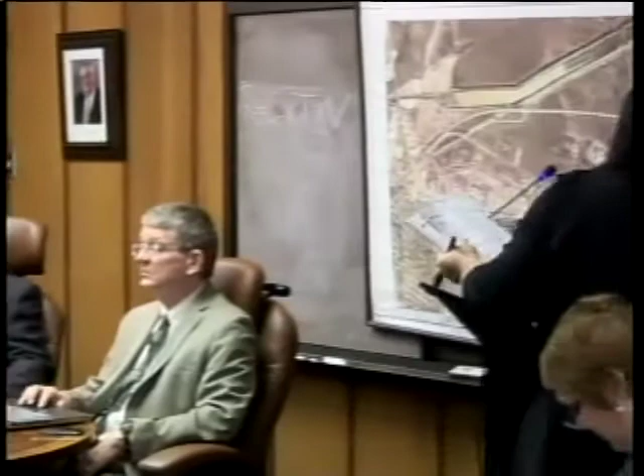Debbie? Commissioners, the operating summary for the month of February is in your backup. As you'll see, the year started off well. Our operations are almost $1 million in net income after the first 2 months. Cargo statistics are running ahead of last year, and all the other indicators are staying really well. Looks like he's having a good year.

It looks like income is up, but expenses are down. It's a pretty good combination. A lot of our effort has been going into the capital improvements program, and seeing the new patios, we're really growing. It's all fitting together. It's great teamwork. Just keep it up there.

Yeah, the rail especially. Just look at the numbers, same time last year versus this year. That's a good sign. In fact, today they're really moving a lot of cars. And the throughput this year, we're not sitting this stuff on the ground. We've got another slab back. In past years, you'd see that stuff sitting.

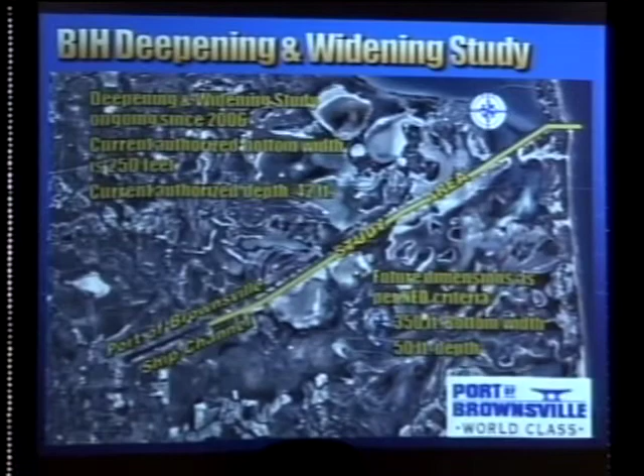The first thing that we always report to you on is, of course, the deepening and widening study. I'm going to go over some of the things that you already may know, because the last time I gave a report like this was 2 months ago, in February. In March, we didn't have the second board meeting.

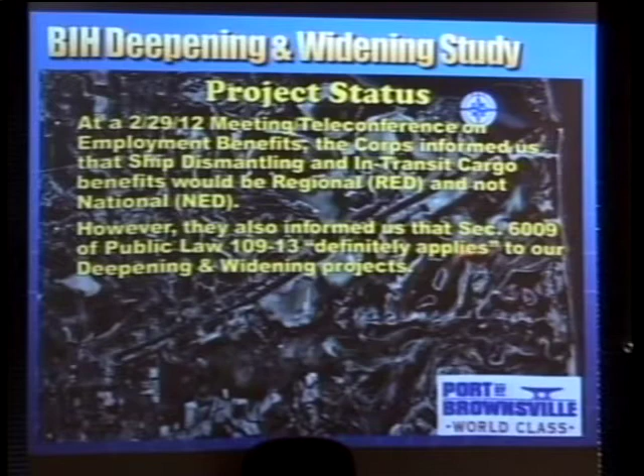On February 29th, we had a teleconference on the employment benefits. The Corps informed us that the ship dismantling and in-transit cargo benefits would be regional and not national. What that means is that even though there are benefits, they cannot be used in the calculation for the benefit to cost ratio that determines where this project is going to wind up. However, the good news is that they informed us that Section 6009 of Public Law 109-13 definitely applies to our deepening and widening project.

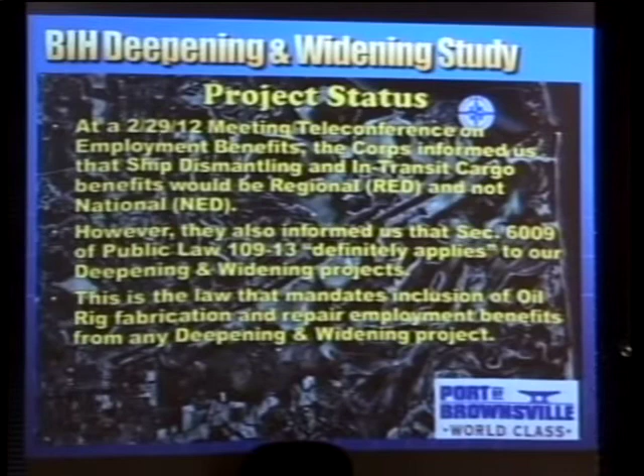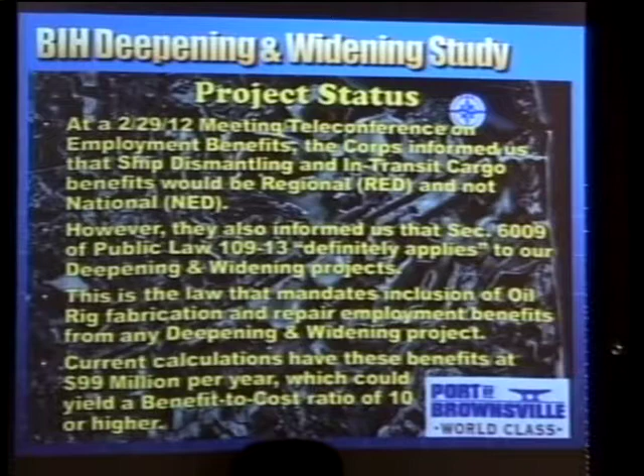This is the law that mandates inclusion of the oil rig fabrication and repair employment benefits from any deepening and widening project. If you remember, our current calculations have these benefits at 99 million per year, which would yield a benefit to cost ratio of probably 10.0 or higher, which is almost unheard of in the studies they have recently done. Usually the studies they've done are considered fundable if they're over 1.0, and this is here at 10.0.

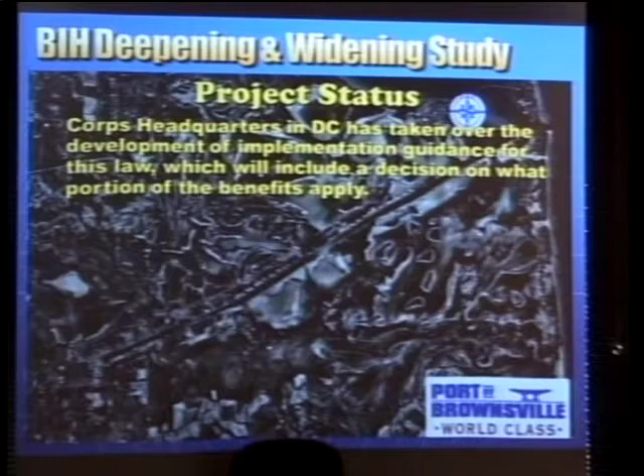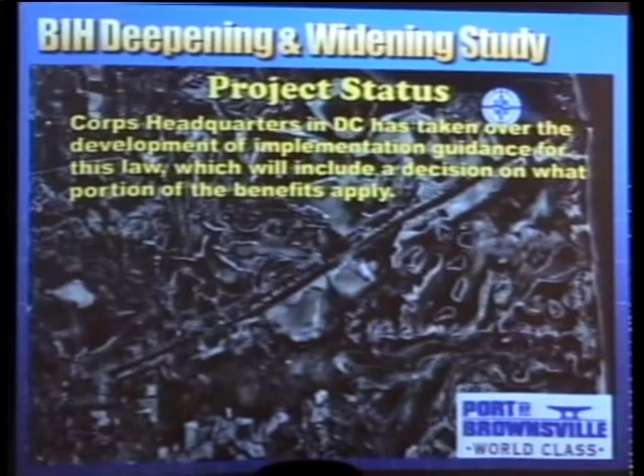So that's why we've been campaigning hard to try to get these benefits included. Right now, headquarters in Washington has taken over the development of the guidance as to how this law is going to be applied, and that's going to include a decision of exactly what portion of those 99 million will apply. Even if they take half of that, which is possible, we're going to still reflect a very high benefit to cost ratio for this project.

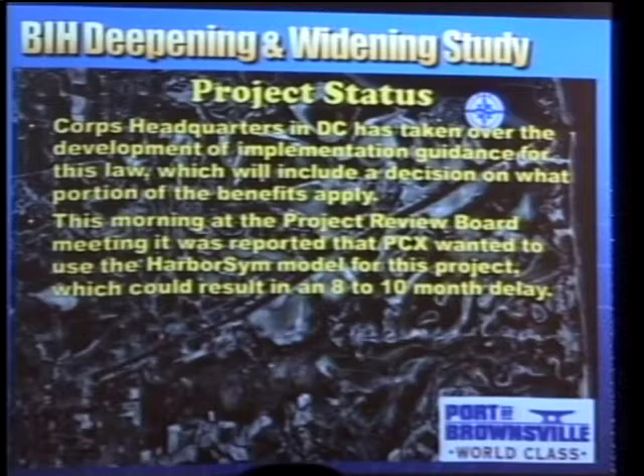This morning I received a call from Galveston, and I reported it to our port director, where it was reported that the Center of Expertise in Mobile, Alabama wanted to use the HarborSym model.

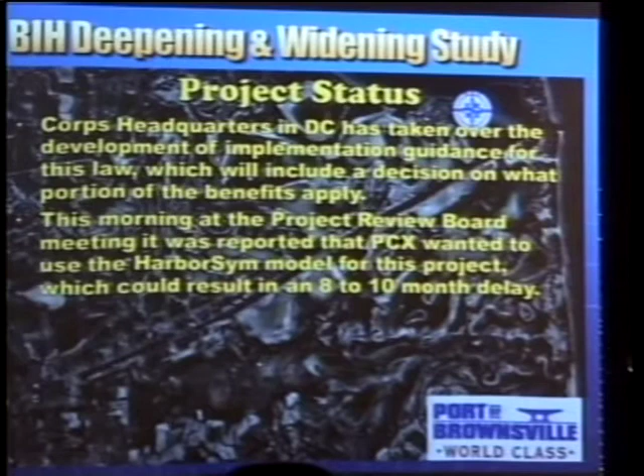Now, what the HarborSym model does is determine what the benefits are due to deepening. But the HarborSym model is a new model that hasn't even been certified yet. The issue is that Galveston already sent the report to Mobile, to the PCX Center, with all the numbers finished according to what they have. I haven't seen that report because that was something recent that they did. And if we have to go back and redo the numbers with the HarborSym model, it could have an 8 to 10 month delay in the project.

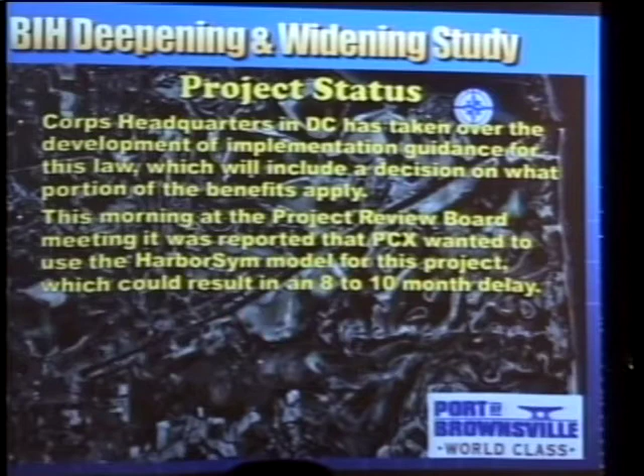However, I will tell you that a few minutes ago, the Galveston district and Dallas, which is division, were working together to make sure that the numbers they submitted would be used. The good news is that it appears highly likely right now that we're not going to have to go through that delay. So I did want to report that we had that concern, but as of this afternoon, that appears to be okay.

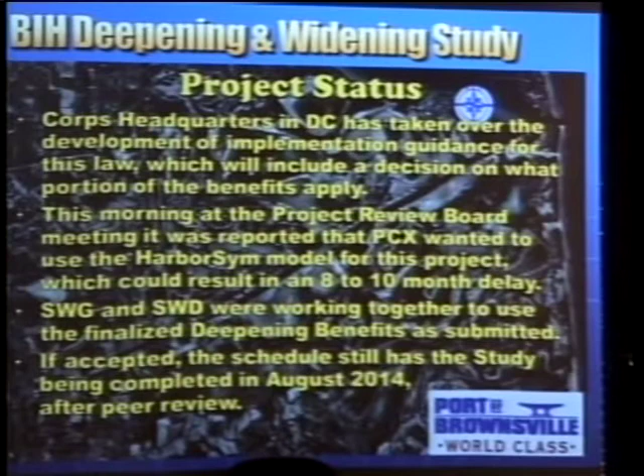So if accepted, the schedule still has the study being completed in August of 2014 after peer review. Again, we're working with headquarters to try to reduce peer review so that we can get a study finalized earlier than that. August 2014 may not work for us, and that's kind of new. We had hoped that the study would be finished in 2013. That one year is significant enough for us that we've raised that as a real concern.

That's why we want to eliminate peer review, because, well, peer review is not going to be eliminated. What'll happen is that in order to keep on track with accelerating the schedule, peer review can be done at the same time the report is out for public comment, so you don't have to delay the study anymore. Peer review is strictly a technical review, not one that raises questions about whether you should have done this or that—it's purely technical. The assurances we got at headquarters were that peer review would be done simultaneous to the public review, so it would not slow the process down.

That's good news, basically. But August 2014 is a concern, because if you're going to see a major funding bill in 2013, you don't want to miss that window.

Whether you'll see WRDA, the Water Resources Development Act, hasn't happened in 7 years. They're pushing for one, and we want to be in a position to have a chief's report issued—everything complete, in hand—for any major legislation dealing with significant infrastructure funding. That's something we're still working on.

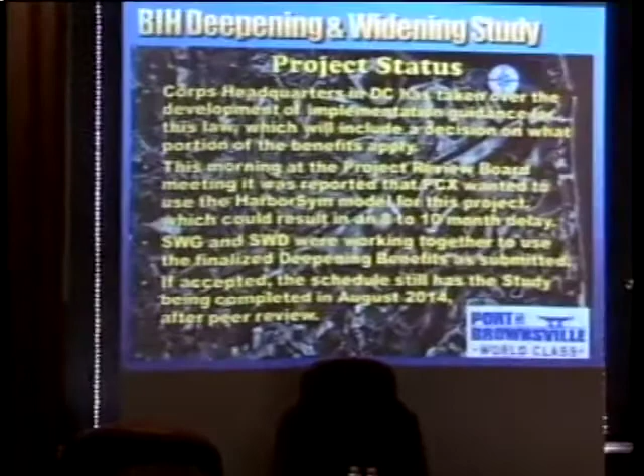Our people in DC are working on that together with our port director, the people in Galveston, and the people in Dallas. We're working through all the levels.

Going back to our projects here, this is a project being worked on right now with our own forces. Our maintenance department is working on the area behind sheds 10 to 13. This is generally the area they're working on right now.

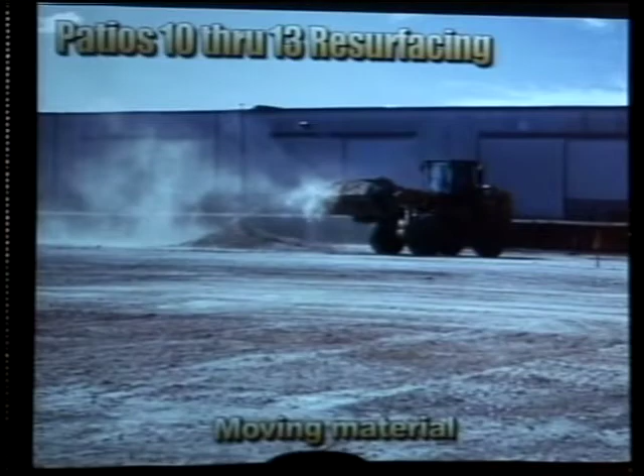As you can see, this is the area that needs to be regraded. We've already set the stakes, and our surveying crew is working with the maintenance department to properly cut the grade. What we're doing is trying to create a ridge approximately in this location so that drainage brings the water out and minimizes runoff into the rail area.

That was one of the issues we had, if you remember, when there was a rain that left that rail underwater. Most of that water actually came from an overflow from the main ditch over here that overflowed over Ostos Road. So we're trying to redesign that to minimize, if not prevent, that from happening. That design has been completed, turned over to maintenance, and maintenance is working with it.

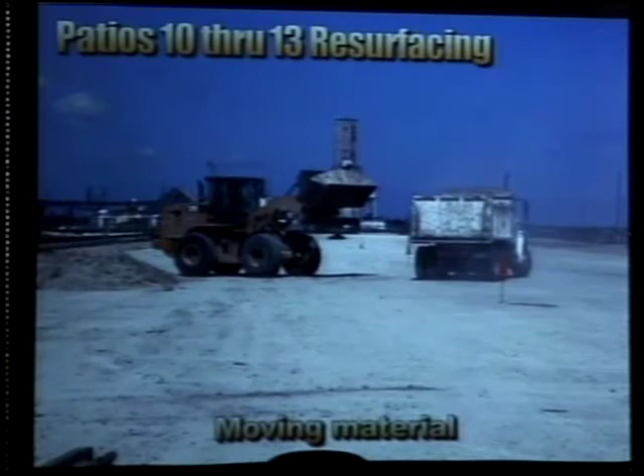That's the area to be regraded. This is our equipment moving material out of there and getting everything ready. As you can see, there are the lath and stakes set by our surveying department, and here's some of the work preparing the subgrade so we can start building up from there.

The other part is that this area has never been used—never been available for storage. So we just want to complete it. We'll be able to recapture or capture more storage area by doing that work, essentially maximizing the use of the area behind the warehouses for storage.

That thing's been on the radar for a couple of years, so I'm glad we're finally getting to it. Are those utility lines that are there?

Yeah, those pole lines just run parallel. That's lighting. Those are probably going to go at some point. We've got, I think, one of the agenda items is the high mast lighting. But that was done some time ago.

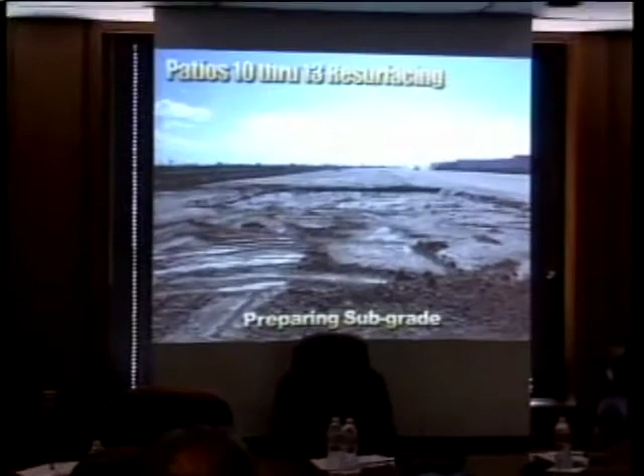The line that was going across the patio, north and south, is already gone. So the only thing left is that pole line, and we may remove it once we get the lighting all done for those back areas.

One of the projects I'm going to show you in a couple of minutes is the TWIC area lighting that we are almost complete with right now. As Mr. Campirano mentioned, we have the high mast lighting on the agenda for you to authorize us to go into that.

The high mast lighting is going to have underground lines and poles closer to the fence, so the old poles will be gone, and it'll be a different type of light that basically illuminates this whole area.

I'll be bringing something to that effect next month, so you can see on the screen more or less where we're planning to have those lights. We're finalizing that project with the consultant right now, and that's why we're asking for permission to go out for bids.

We have one meeting pending next week, still to be scheduled, with the stevedores to show them what we want to do and make sure they're okay with the plan.

So that section where the windmills are, you have shown that? Yeah, I'm going to show it in a second. I think that might be the next one. What was that?

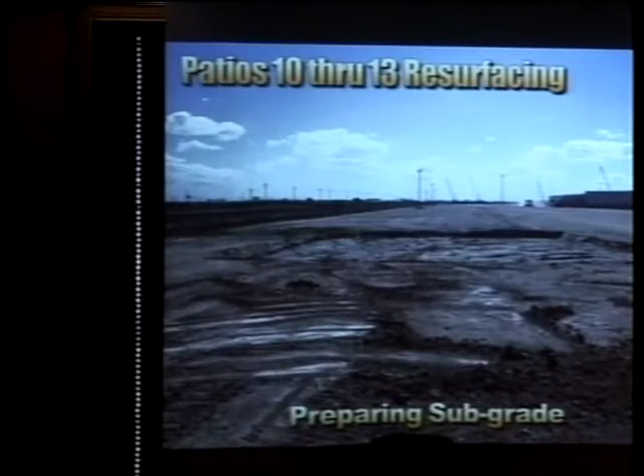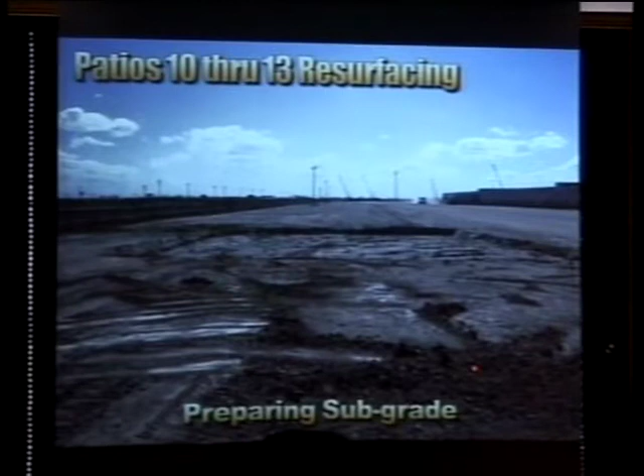Sheriff, what was that patio used for before we couldn't get to it? We've always used it for storage, except for the east part, which we never improved, so we never laid anything down there of significance because it was never prepared. Okay, so now we'll be able to use the whole area instead of just part of it. The design covers the entire area from Dock 11 Road to Dock 13 Road, so with proper transitions, all of it will be covered.

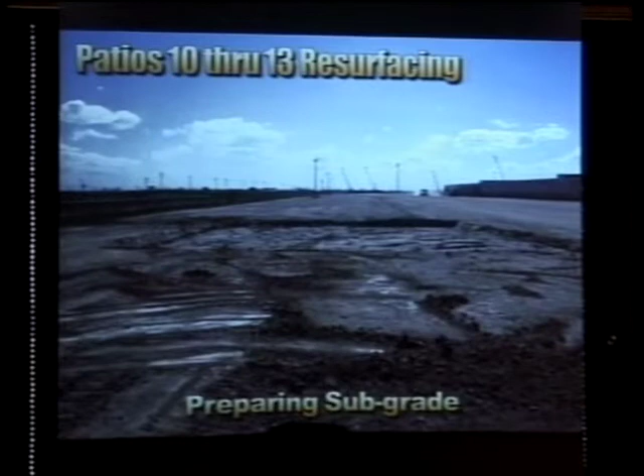Joe said we'd add a little more than an additional acre of storage in that area behind the sheds, on the eastern side. That's premium, because the areas closest to the dock are prime. So we'll pick up additional storage area by using this.

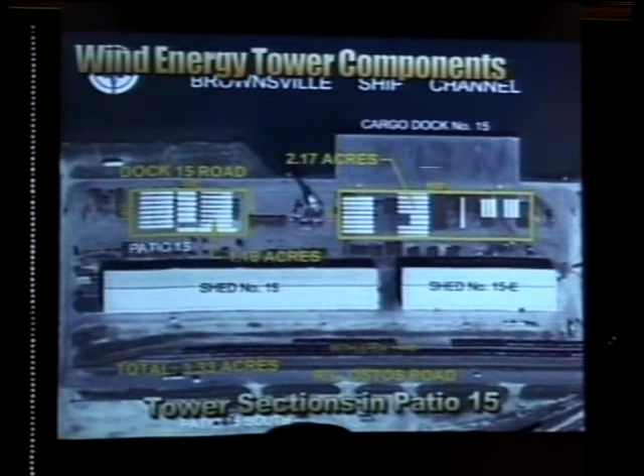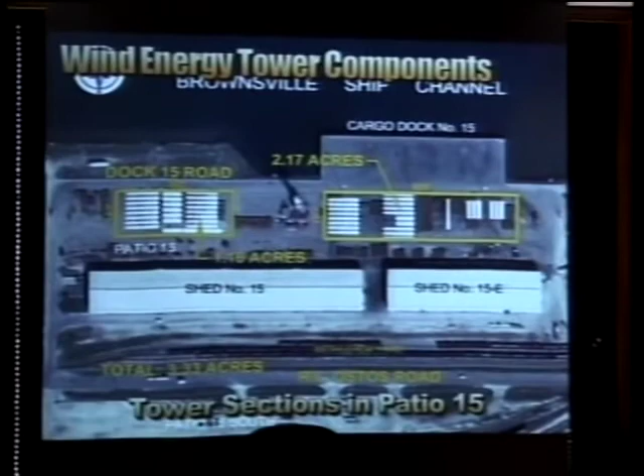The wind energy tower components that have been coming into the port - this is the area on Dock 15, Patio 15, right in front of Dock 15. That is still occupied, as of last time we measured, which was Thursday last week. Everything you see here was the way they delivered it initially. That's still there. In Patio 16, the area east of Dock 15, that's still there too.

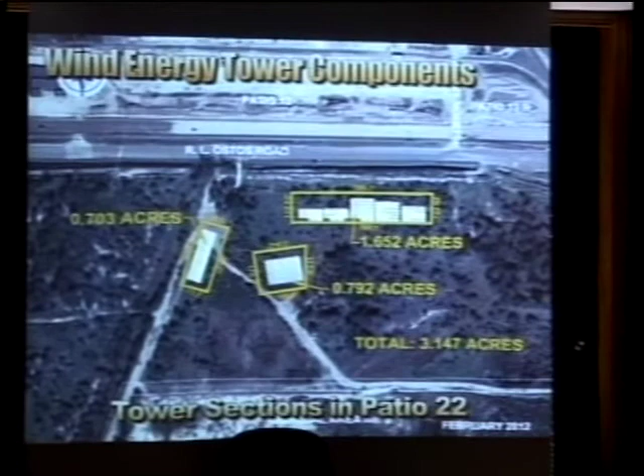On the Patio 22 area, as of February 2012, we had basically just tower components there. But in March, they brought in the blades, which we stored in this area. As of April, they had already removed all the windmill tower components, and they reduced the area where they were storing blades to right here.

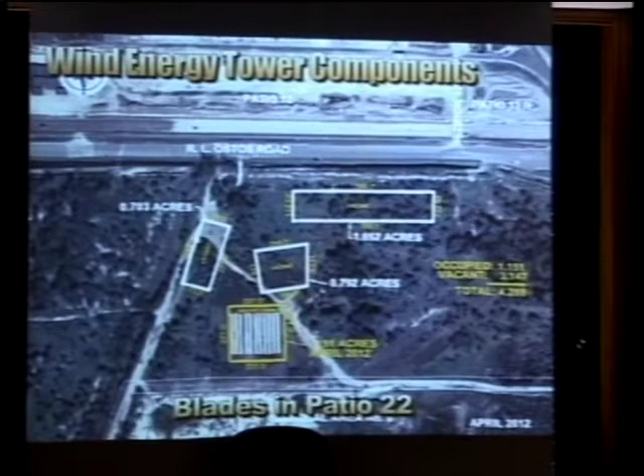We're going to get them off the docks. They're actually eating at it now, just starting to get into it. That's our situation - they removed these first when we wish they would remove those over there first. But we're working on getting those sequenced in that order.

Now I'm going to show you here - back to that area. That patio has a real weak area in it, unless you fix it - it had a sinkhole basically. They avoided it, I think Joe said. So we don't have any plans - there was an area here where we had some soft sand.

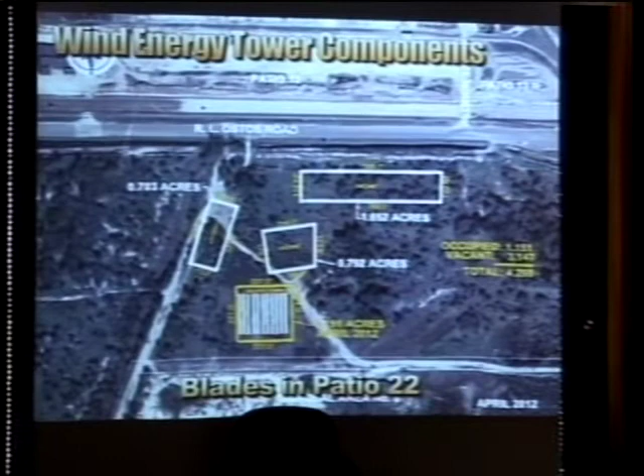We had the soils engineer come in and do some analysis, some penetrometer exercises there, and we determined the areas that were weak. Mr. Garza was removing the weak soil and filling it with better material, then putting limestone on top of that. So that's already bridged over - well, not all of it, but we're working on it.

We finished this area, and in order not to stop and come back to that, we went ahead and finished that whole strip to the back. We went on this side, but they're working on that - the weakness was about in this location right here. So that's being worked on, and we've already determined what needs to be done. We got a recommendation from the soils engineer on how to proceed, so that's already been addressed.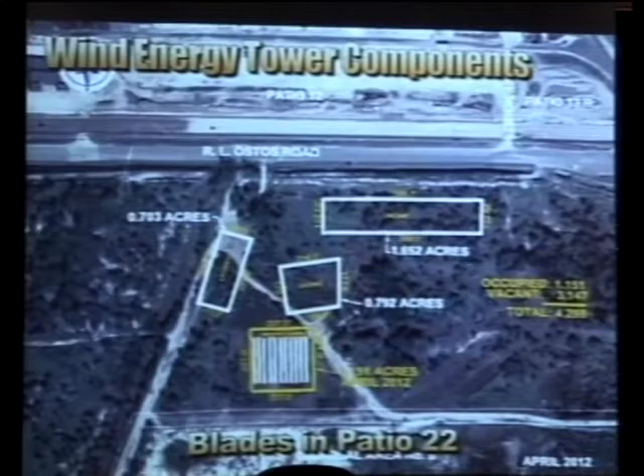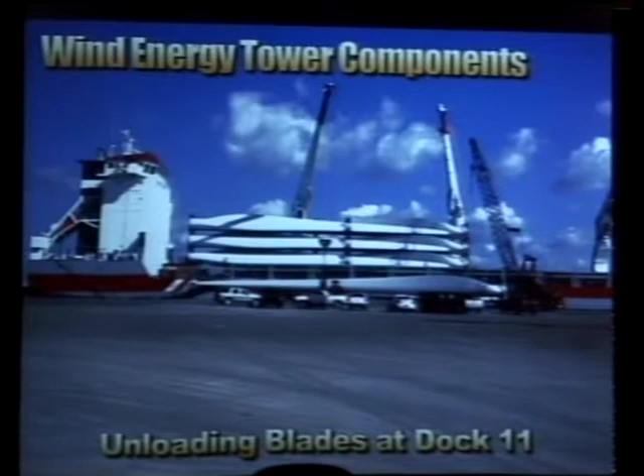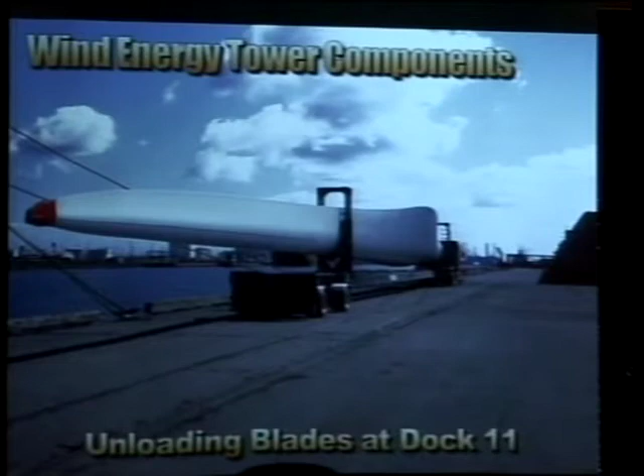Here's a couple of pictures of the unloading of some of these blades. This is the second shipment of blades, the one that's actually there on Patio 22 now. Here you can see the blade on the truck going out, and here it goes out through the back and turns out on the east side on Dock 13 Road. This is the 45 blades that are remaining there - I call it remaining blades because that's what remains. Originally they had 80 blades, and most of those already went out. Now this is what's remaining there, basically, of the components.

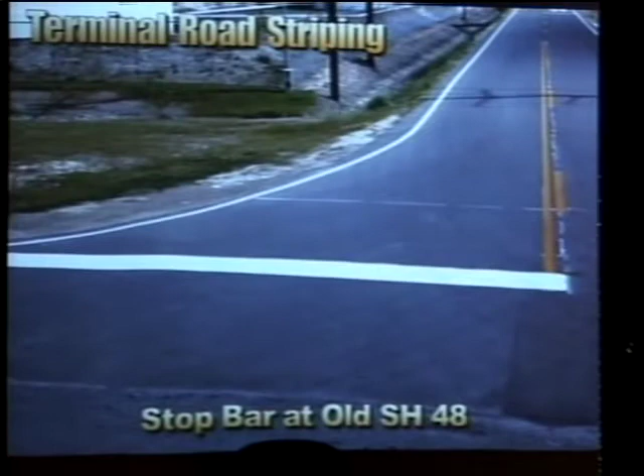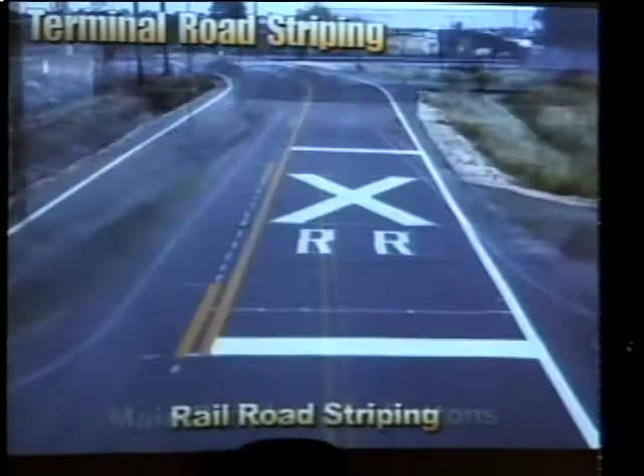Another project we've been trying to do for a long time - we finally got some work done on it. This is Terminal Road, an overall view of the striping. This was done last week for the stop bar at Old SH 48. This is the main striping, you can see the traffic buttons at the gaps here, and this is the railroad striping, in anticipation of the railroad. The only thing pending now is setting up the traffic signs - we have the traffic signs already.

I have them in my office. Well, get them in, because as soon as those line up, we're going to see hundreds of trucks, right Kevin? So get them in. I was waiting for Kevin to say yay. That's why I looked at him over there. It's okay dude, where are the trucks? Come on.

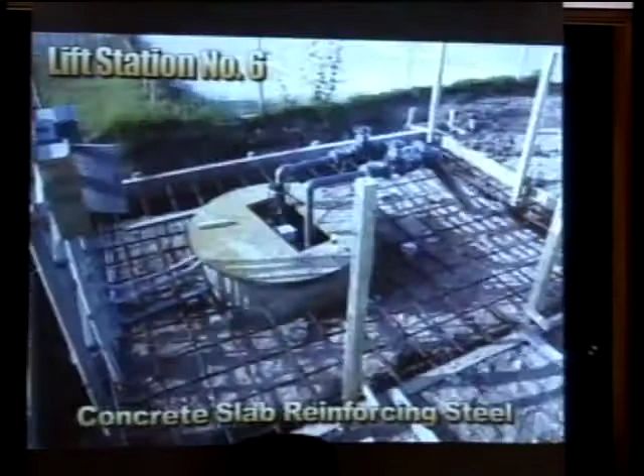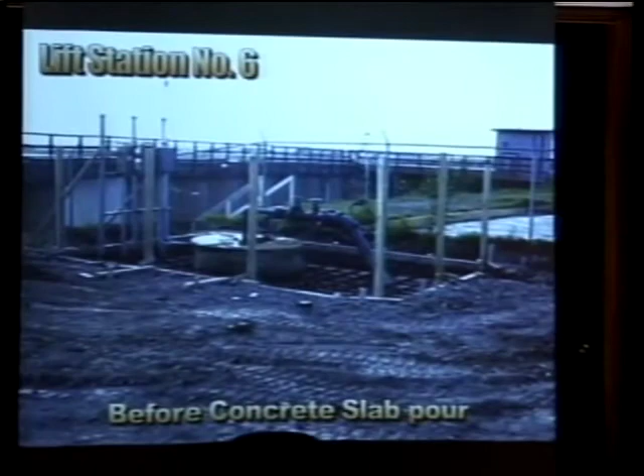This is the reinforcing steel there on the lift station. This is the electrical control panels that were set with new poles with a new H-frame. We actually wound up having a third pole in the middle because the electrician had set the pole on the wrong side, and we had him put it on the correct side. So basically this is the site before the concrete slab, where you can see the reinforcing steel.

Here's where they're starting to pour the concrete. This is when they're working on most of it right here, and then here you see the slab done. This is basically the completed work by the contractors.

Now our staff is going to go and set the horizontal - what do you call them - the horizontal bars for the pickets that will go on the fence. There's not going to be a door on these.

So I originally had planned on having a door right here, but Mr. Casa and I agreed, since there's a man door in the chain link fence a little bit further this way, we're going to relocate the man door to right about there. So the access to the lift station is now going to be from the other side, and there's not going to be any access on this side.

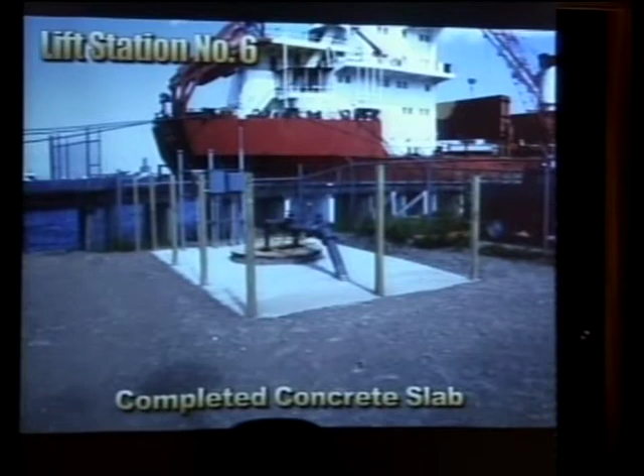The reason I wanted to do that is because we're going to be able to landscape this and not have trucks coming in and out from this side into the area in front of the Seamen's Center. So we've got that taken care of. We're going to pour a little bit of concrete slab right there just to let the guys walk in, and then I'm going to surround the rest of it with some limestone, so we keep the vegetation under control in that area within the fence.

But this fence is going to tie into this fence right here, and as you can see, that pole is already there next to the other chain link fence. So we're going to have two chain link sides and two wooden fence sides, but the wooden fence sides are the ones that shield the lift station from the Seamen's.

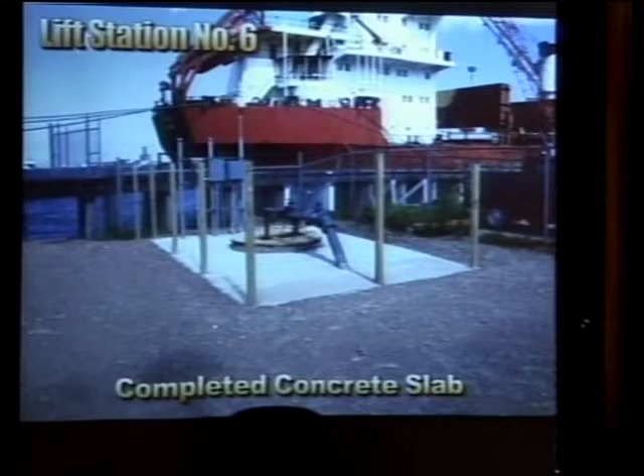The wood fence will then continue on down and connect with the other - yes, so it'll be a continuous wood fence all the way, and it'll separate the space between dock 2 and the Seamen's, dock 3, excuse me.

So that's what we're trying to do with all our lift stations right now, and hopefully next month I'll be able to bring you some more pictures of new lift stations we're doing. There's three that we're doing on the south side over there, all the way to Bay Bridge, that we're trying to upgrade to this standard.

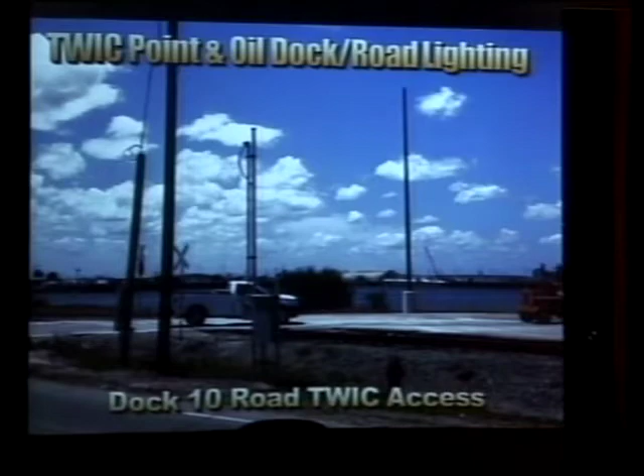Was it stolen on Port property? Yes, somewhere. It was stolen on Port property. The thing is, they left poles with the fixtures overnight because they were going to set them up the following day. When they came back that day, 2 of the fixtures were missing, and those are custom-made fixtures.

They're not shelf items, so they have to order them and get them made and shipped. They expect to get them before the end of the month. Do our cameras pick that up? No.

Chief is here. Well, 2 things with that. One is that we weren't advised that the material was left on the ground, so we keep an eye out. Secondly, we didn't know anything about it until after the fact, but no, the cameras didn't pick it up. The area where they were picked up was over here on the south side of the patio area that we're working on, and the cameras don't pick up that area. So the cameras usually go towards the water.

So anyway, that's the TWIC lighting. Here's the Dock 10 one that I showed you, and then the other project is the internal roads project.

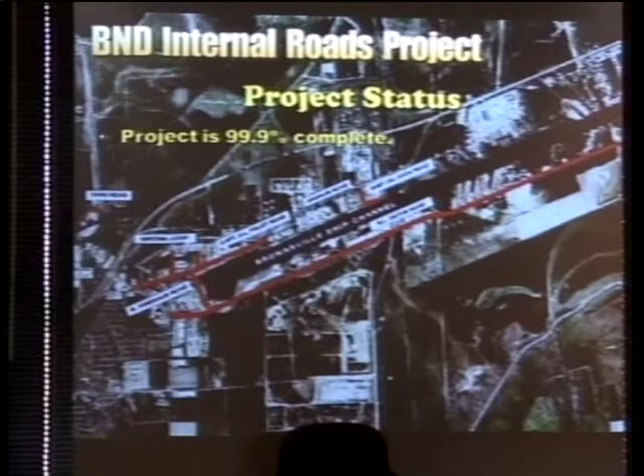This is just a quick report here. You're already familiar with the map. The project is 99.9% complete. We're almost done with this.

A walkthrough inspection was performed in early March, and we found several areas where we saw some problems, and we marked them for the contractor. They identified and marked it. The contractor addressed most of the areas of concern. Some of the areas were iffy, you could see some issues, but there was no significant settlement.

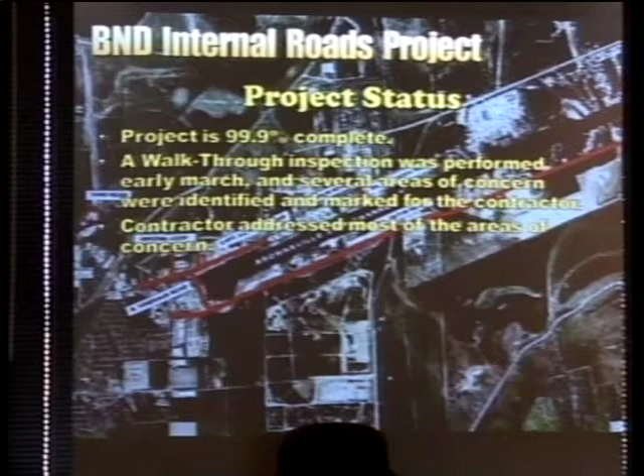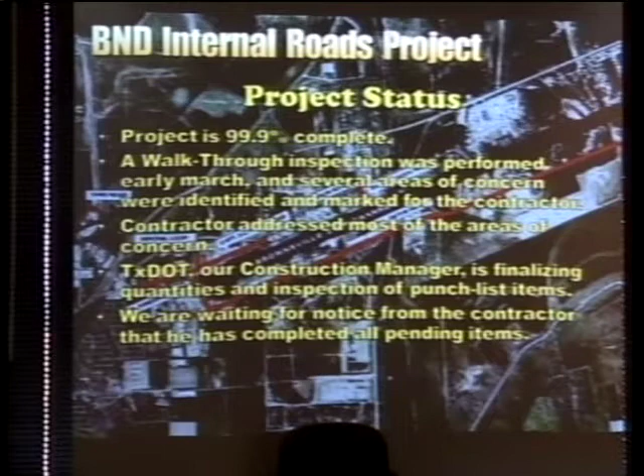TxDOT, our construction manager, sent an email yesterday, and we got a response from the contractor today that they're finalizing the double check on the quantities to close out the project. So hopefully once that is done, we're waiting for notice from the contractor of completion of the pending punch list items we generated.

And what about the money they owe us? Excuse me, what about the money they owe us?

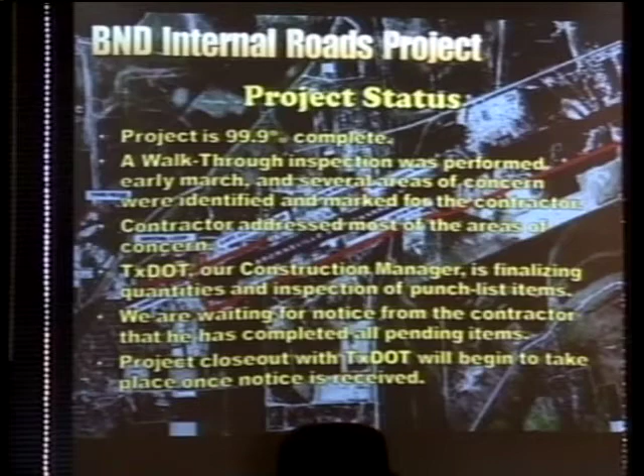Well, the way that we manage that, we worked with them on some of the work that wasn't done, and we got credit back more than what we had projected was our expense. So we've already washed that out based on some of the work that they didn't do that we wound up doing. So that's already—

How did you verify the cost and all? Well, we calculated our cost—our maintenance department calculated the cost we had, which was about $8,300. Then we compared it to the amount we had to deduct from their contract because of uncompleted work and some other issues. Their work was in the 10 to 11,000 range that had to be credited back, so that washed out our expense from the contract. In reality, it worked in our favor—we covered it in that time.

The other project, a little bit of additional work was done on the connector road right at the entrance. Remember, this is 550—550 is going to end on 48, and our connector road is the road that goes from 550 to Fouts Road.

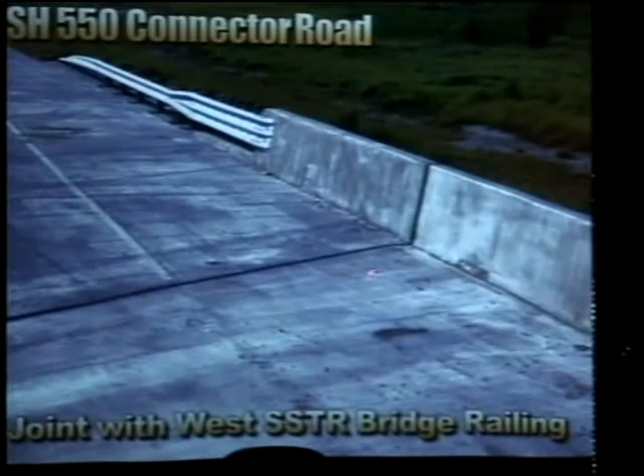The railing here hadn't been built because they were waiting for the other contractor working on 550 to finish some of their work on the north side. So now they came in—this was done about a month ago, but you can see they already put the railing here and the bridge railing, the concrete railing on the side of the bridge. This is the new portion of the work that hadn't been done yet, and now it's there. This is on the other side, and here's the railing on the east side of the bridge.

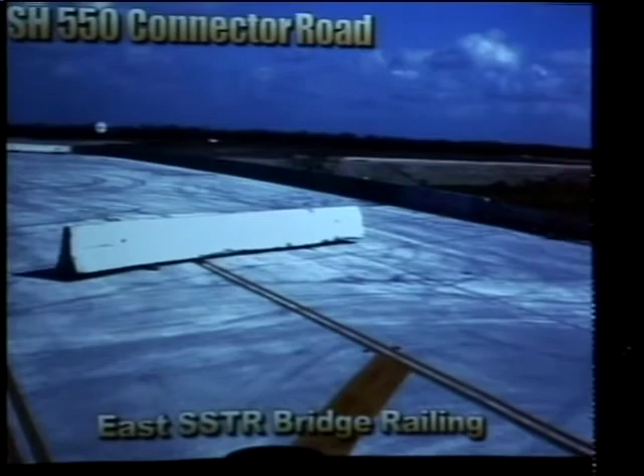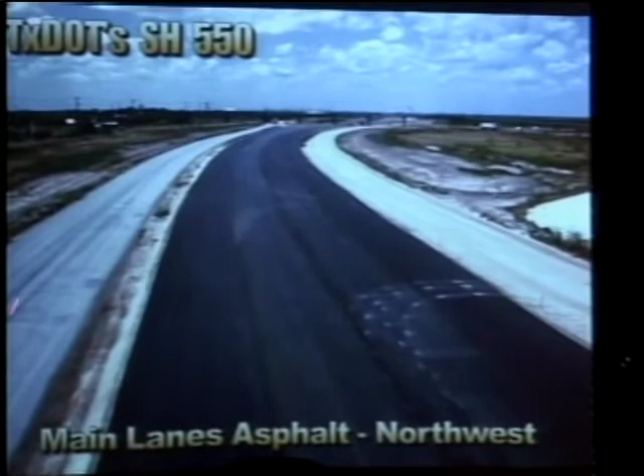And the last project is 550. There's a lot of progress on this one. Again, we showed you this a couple of months ago—this is already hot mix, asphalt surfacing already on the main lane, and they're working on this frontage road with some of the gravel prior to the hot mix.

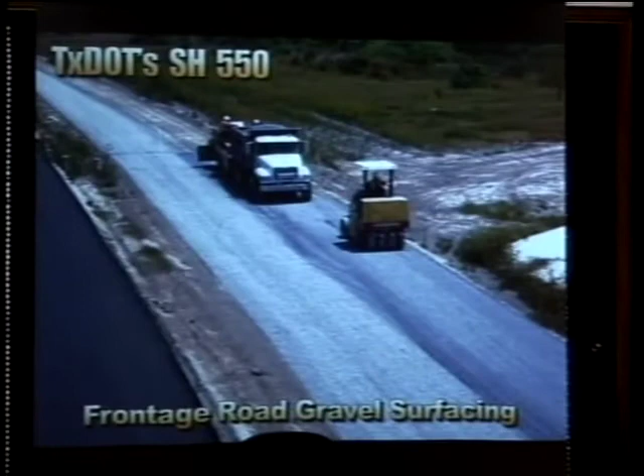This is looking back towards the port, and you can see a lot of work has been done. Here's work on the gravel surfacing on the frontage road. This is the old Port Isabel overpass, shot from the north, looking down towards town, basically in that direction. This is the overpass itself—they've already got all the planking set up on top. So this is a lot of significant progress.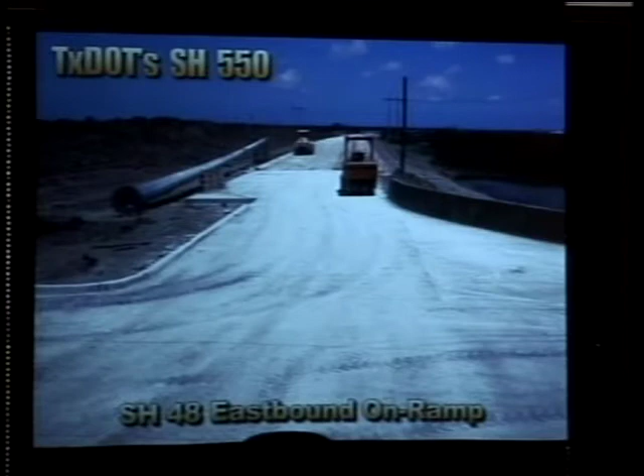This is how you would get off 48 into 550 over here. This is 550, and this is the off-ramp going westbound. This is the eastbound off-ramp where you would get in to get into the port—the port is over here. You would get off 48 to go to the port, and this is the eastbound on-ramp. So a lot of progress they've already done on there.

This pole kind of caught my attention, so I took a close shot of it. And here's the foundation for that pole—that's some of the high-mast lighting that's going to be right there at the overpass.

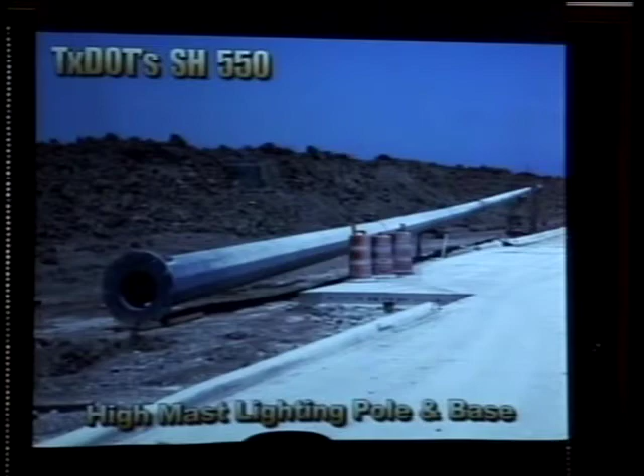On another note, Eddie, maybe you can help us out. When you and I went to the MPO, there were a couple of people mentioning where the entrance of the port city comes in, TxDOT is fixing it, and they've got it down to one lane. People going to or coming from the island who drive by would be most affected. It's a narrow road. I don't know if you could do something about that. There's going to be a bad accident waiting to happen.

Where is that, when you're getting on? What they've done is on 48, the two-lane road is now changed to one lane, and it's very narrow there.

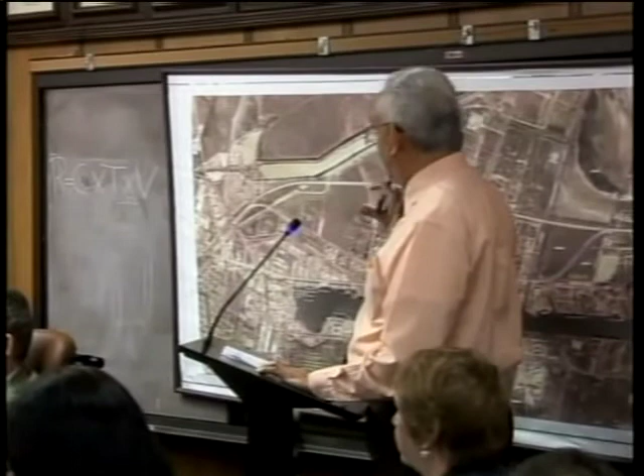Is this, just briefly, where is this high mast lighting going to be, at only on certain docks? Well, basically, the way the project is named right now, we would be selected docks, but the only docks we're looking at are basically the area behind sheds 12 and 13. There's one light going right about here, and another one right in this area, but basically it's lighting the cargo dock area here and the area here on dock 15.

This is the lighting that's outside the security lighting, even though it will also be security and help secure the boats. It's the second phase of the dock lighting, not associated with the TWIC entry locations or the oil dock. We had talked about wanting to provide lighting to the work areas, and also to provide security. This is the second phase of those cargo docks. But this is going to provide a lot more lighting because it's really going to light up.

We've been working with the stevedores and all that from the beginning, but before we go out, it's not a bad idea to just check one last time.

Are we gonna try to use energy efficient lighting in our request for bids, like LED lighting? Well, this is high mast lighting, so it's not gonna work with that. The LED will probably not work for the high mast. This recommendation for high mast lighting was to try to reduce the number of light poles you have in the area, because remember, these are all work areas with cranes, so it's a compromise to get away from more structures. The recommendation was to go to the high mast that lights a much larger area with less structure.